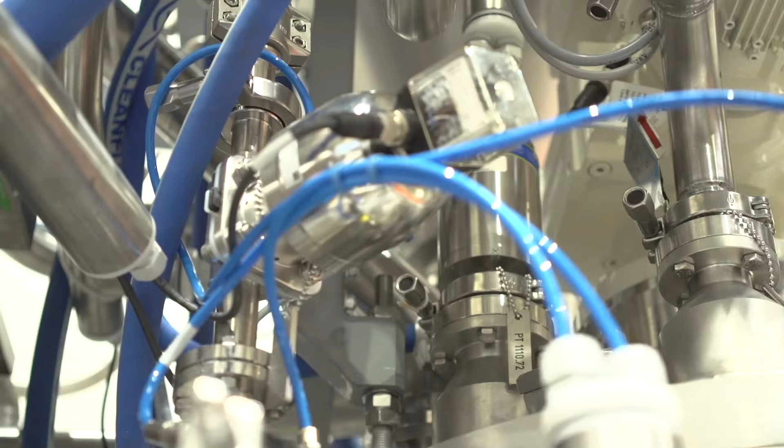Today we are going to talk about Hosokawa technologies used in the battery industry. Powder processing technology plays an important role in the battery production. Today we will tell you something about the role Hosokawa can play in this type of industry. We will not focus on all the details, but want to give you a brief overview of the possibilities of Hosokawa. I would like to give the word to Dr.

Dion Spink. Thank you, Alet. And I will start out by briefly explaining what a battery is and does. The most important battery type is the lithium-ion battery type, and this one contains a cathode, which consists of a lithium metal salt, and an anode, which consists of graphite.

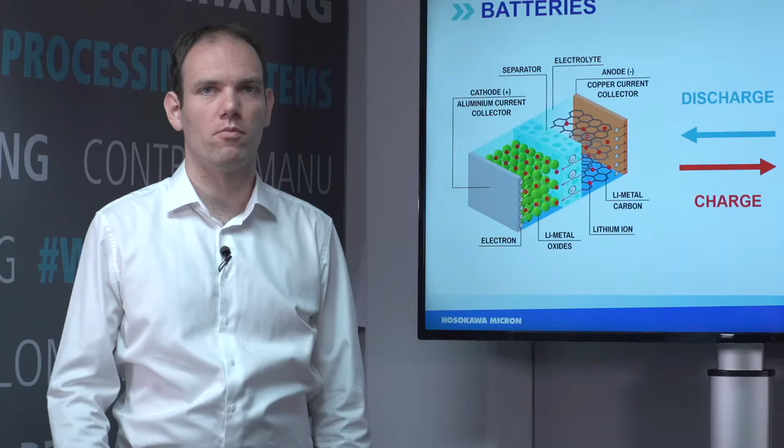And during the discharge of a battery, the lithium hops from the anode to the cathode, and the electron cannot do that, and it has to move from the current collector to the other one over a wire, and this is what's producing electricity. During the charge of the battery, the process is reversed. So the lithium ion hops back from the cathode to the anode, and the current goes the other way.

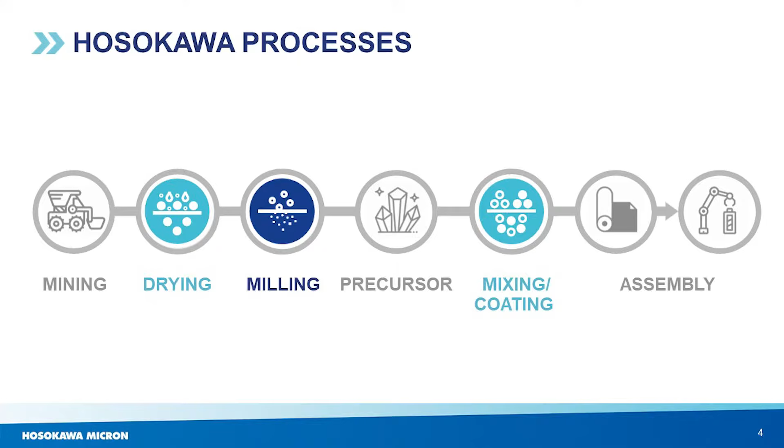All raw materials for a battery start out in a mine, both the metals in the cathode and the graphite in the anode. And then they're made into the battery precursors. And in this process there are some steps involved, and after that the precursors are made into sheets on the current collectors before they can be assembled to the batteries. And we're going to explain to you in which parts of this process we can provide solutions for you.

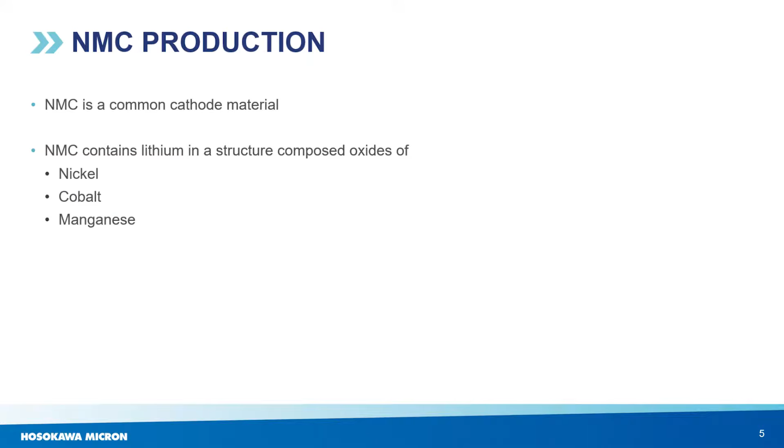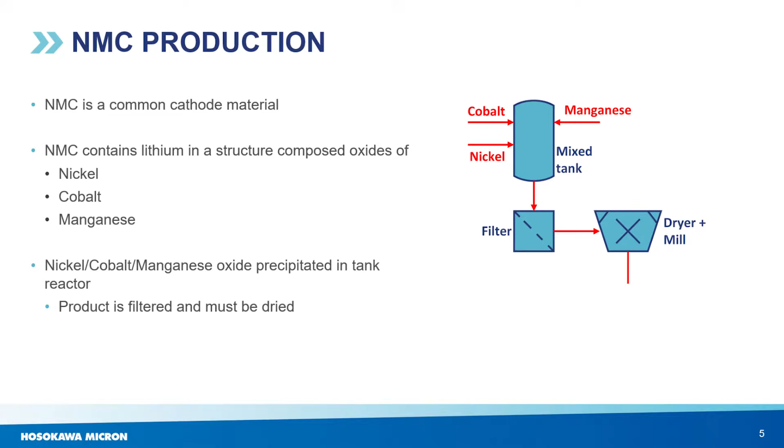We start out with the production of NMC, which is a common cathode material. NMC consists of lithium with manganese, nickel and cobalt embedded in its structure. And the production is started by mixing the nickel, manganese and cobalt in a tank reactor. After this they are precipitated, and the filter cake is filtered and the water is extracted, after which the cake is dried and milled before it can be mixed with lithium and sintered to the final precursor, which is NMC.

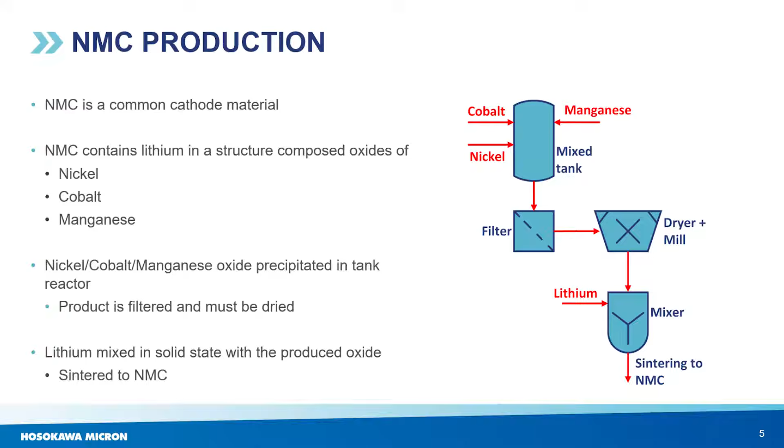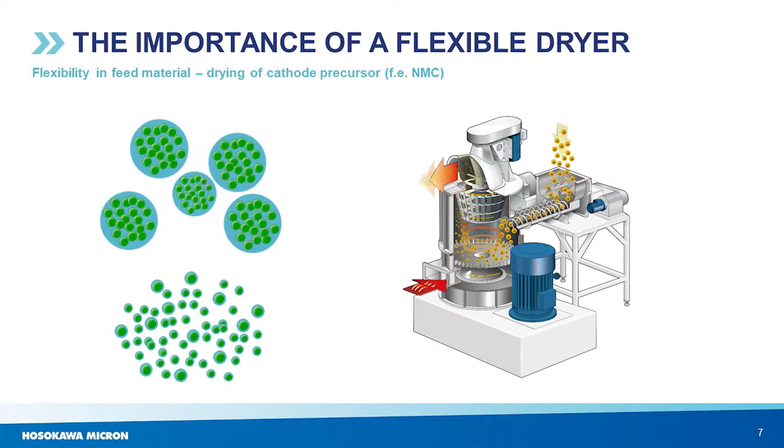So drying is one of the first processes Hosokawa gets involved in in the battery industry. For continuous drying of, for example, precursor material, we use our flash dryer. The product, a filter cake or a slurry, will fall into the drying chamber where we have a dispersion disc. And the dispersion disc is making sure that the larger agglomerates in the feed material will fall into smaller particles, creating a high surface area which is sufficient for drying. We dry up to about 1% of end moisture.

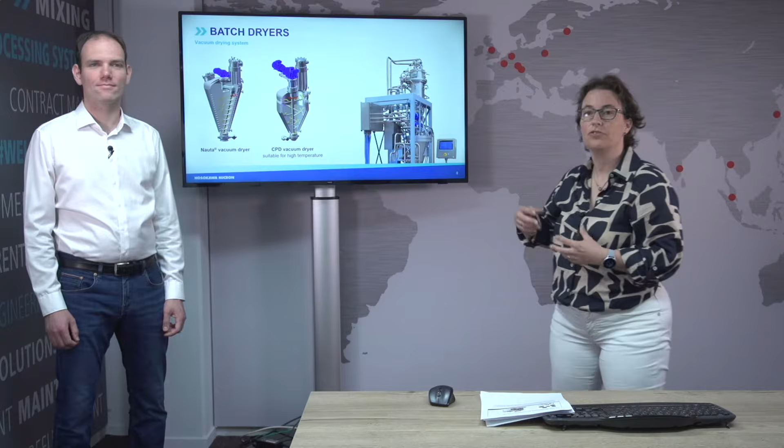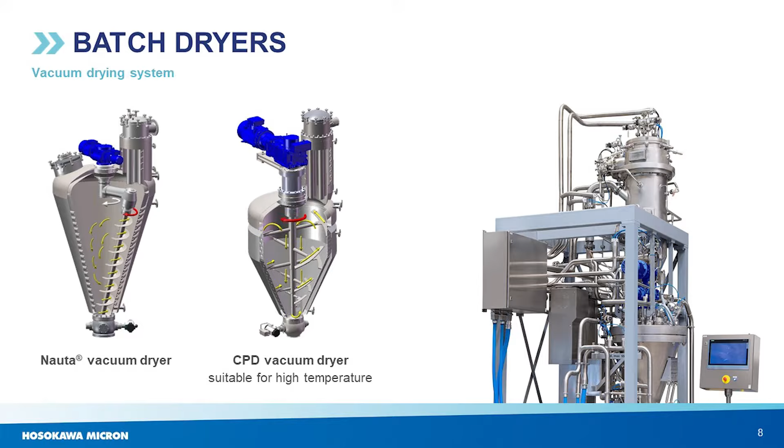If we need to achieve lower moisture contents, we can make use of our batch dryer. We also can use it for smaller production capacities. We have a vacuum dryer, the Nauta dryer, or the central paddle dryer, which can also operate at higher temperatures. The temperatures of 325 degrees C in combination with full vacuum are ensuring that also the difficult volatiles will be evaporated, and we can go to ppm levels.

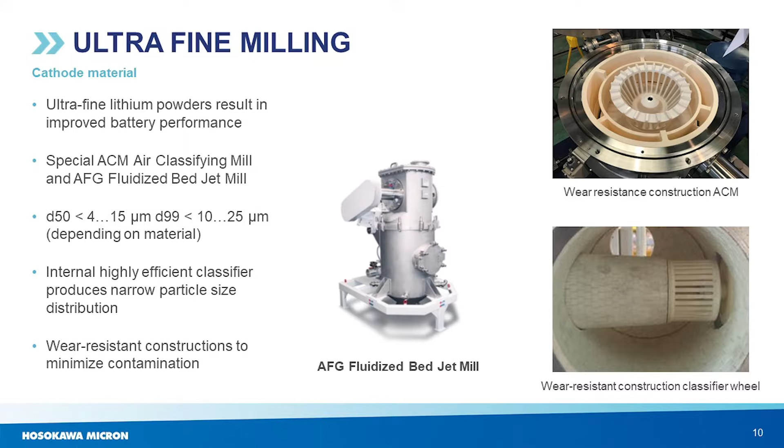In order to increase the efficiency of a battery, it's important to have a well-defined particle size distribution and small particles. It makes it easier for lithium ions to travel from the anode to the cathode and back, as Dion already did explain. Ultrafine powders, like for example lithium cobalt oxide, will result in improved battery performance, achieving for example higher usable capacity or faster charging rates. Who doesn't want to have a faster charging rate?

Hosokawa uses dedicated impact and jet mills in special execution in order to produce extremely fine and a narrow particle size distribution. Top sizes are 10 to 25 microns and a D50 of 4 to 15 microns, depending of course on the product. All mills do include special designs for wear protection with ceramic. This ensures a high purity of your product.

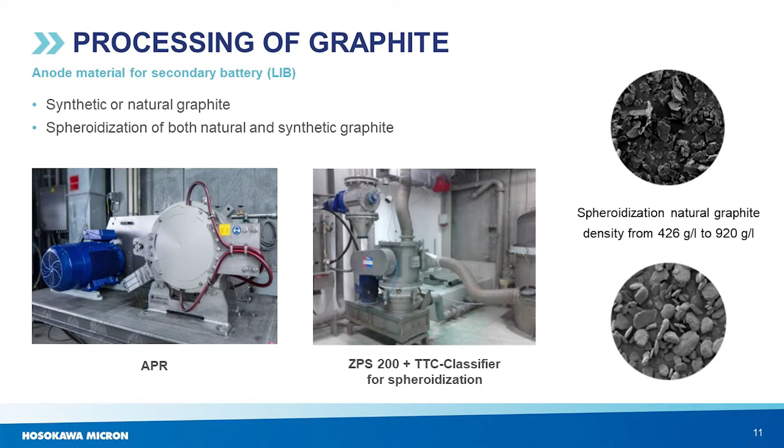In the anode, the active material is graphite. Graphite can be either of a synthetic or a natural type. Jet mills can be used for grinding both types of graphite. Spheroidizing can enhance the density and the wettability of the graphite.

Synthetic graphite is usually already more spherical after grinding and therefore requires less energy for rounding. Natural graphite is plate-shaped and therefore it will be more difficult and more energy is required in order to get a round particle. Hosokawa has for both types of graphite rounding solutions.

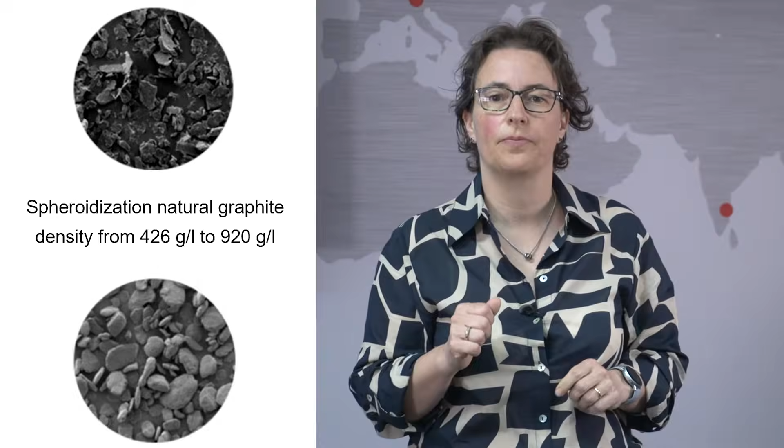Dion, can you explain the step after drying and milling? After drying and milling, when the precursors are produced, it is important to coat them with carbon black to improve the conductivity and to coat them with binders to improve the adhesion. And for this, it's very important that they are coated very well on the surface of the precursor.

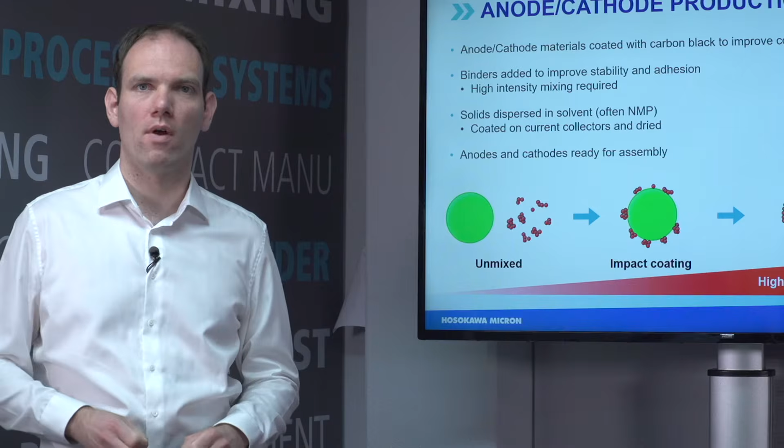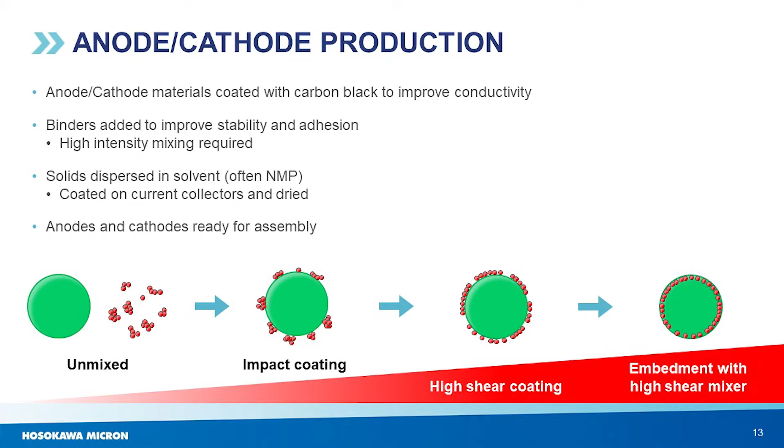And if we mix them only with an impact mixer, then there's a very loose coating around the precursor particles. While if we mix with high shear, the particles coat very well, or are even embedded in the precursor material. This creates a very strong bond between the carbon black and the precursor, which yields very good batteries.

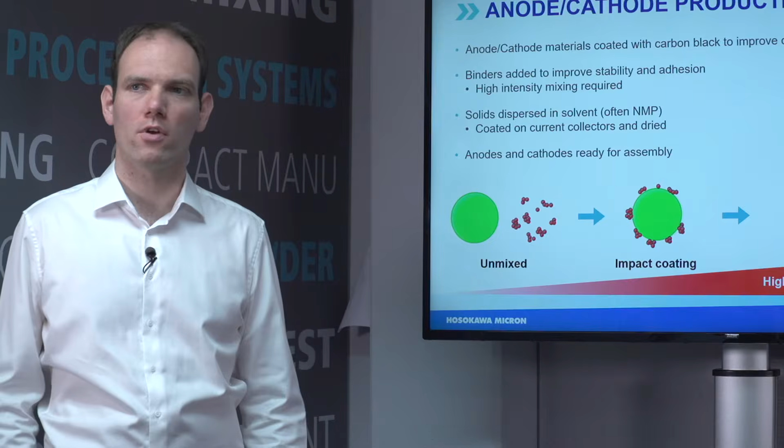After this step, the precursor with the carbon black and the binder are dispersed in NMP before they can be coated onto the current collector and they can be dried. After that, the battery is ready for assembly. In the battery production process, a lot of powders are being mixed. For example, low shear mixers are being used for homogenization or for an agitated feed hopper. Besides powders, the Nauta is also capable of mixing slurries.

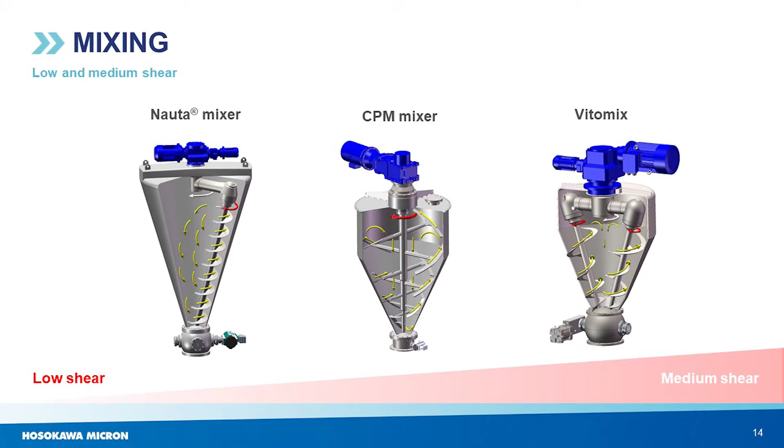However, in most processes, the battery industry requires more energy. The raw materials are prepared and they have a good particle size distribution and very small particles. The particles give a high surface area which is beneficial for our battery. However, it also gives an annoying behavior. The particles act like best friends forever. They are bonding to each other. In order to create a good mixture and to create a coating, this bonding needs to be destroyed. For this we need to have high shear mixers.

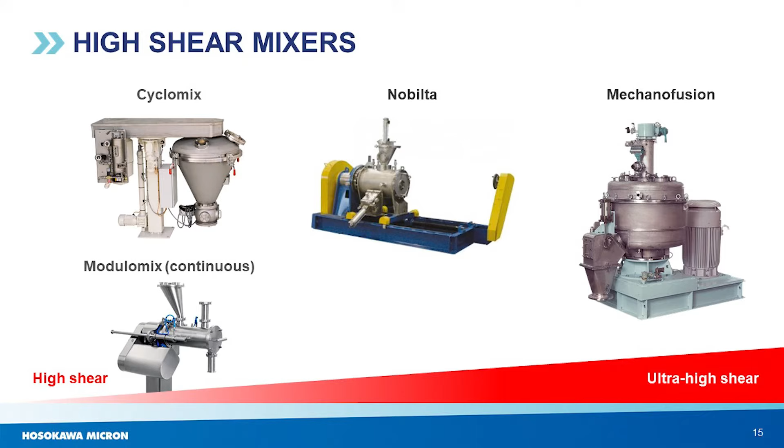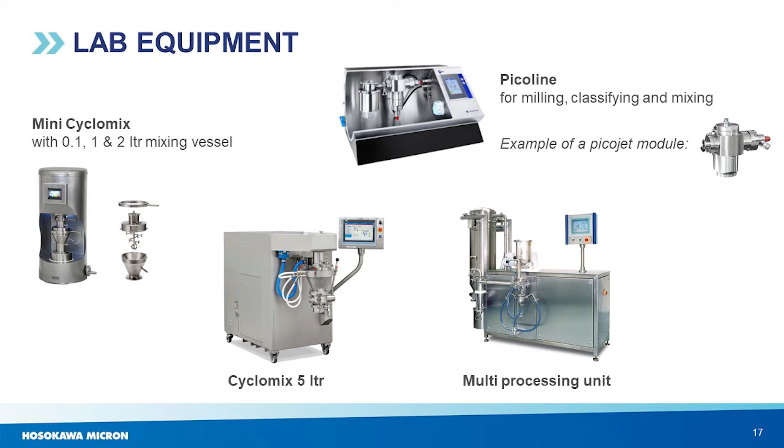In our portfolio we have high shear mixers and ultra high shear mixers, like the Cyclomix and the Modulomix, which is the continuous Cyclomix, the Nobilta and the Mechanofusion. All these units can be foreseen with a wear resistance coating in order to avoid pollution in your products. Hosokawa has also lab equipment for the battery industry. For example, the Mini Cyclomix and the Cyclomix 5 liters, the Picoline for milling, classifying and mixing, and the multi-processing unit. So Hosokawa can cover the whole range from lab to pilot to full production.

And last but not least, safety first. Of course, all our equipment can be delivered with ATEX certifications. However, a lot of materials used in the battery industry are not the most friendly. So we need to protect the surroundings and operators in one way or the other. Hosokawa has several solutions for that.

So, for example, personal protection, which is not part of the Hosokawa supply, but a downflow booth can be used in order to obtain OEB levels of OEB 3 or 4. Split butterfly valves can be used for OEB level 4, or isolators to go to OEB level 5.

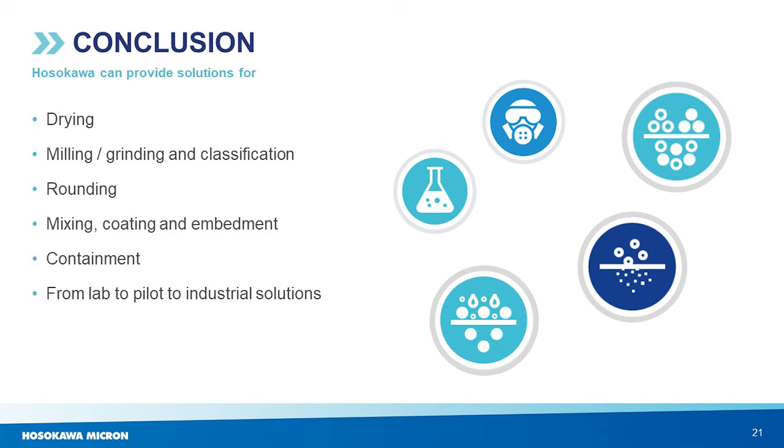So, we have given you a brief overview of the capabilities of Hosokawa in helping you with the challenges in the battery industry. Hosokawa can help you with drying, milling, grinding, classification, rounding, mixing, coating and embedment, containment, and we have from lab scale to pilot scale to full industrial scale equipment.